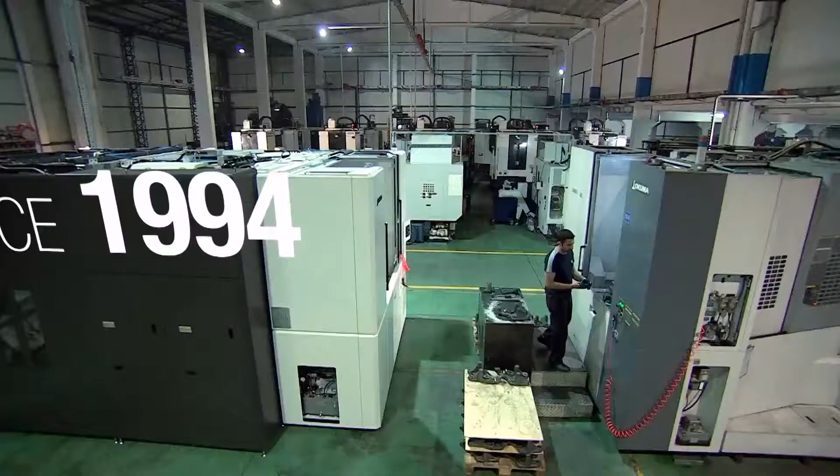Merging its 65-year sectoral experience under the roof of Sampa in 1994, the company specializing in heavy vehicle spare parts has established cooperation with international brands and has confidently adopted as its mission the manufacturing and service quality forever.

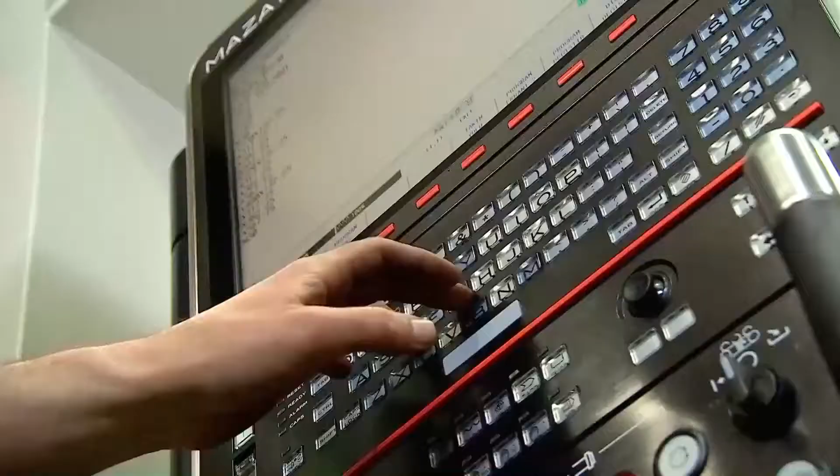700,000 square feet of production area. 1,080 employees, 144 of whom are engineers and technicians. Production for 18 different brands of European and American origin. Modern production units equipped with cutting-edge technology, consisting of more than 3,300 machinery.

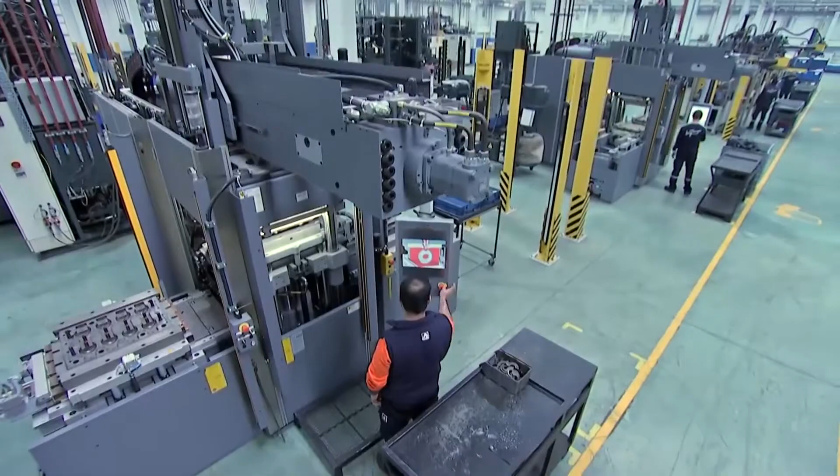Offices in the USA, Germany, Dubai, Russia, China, and Kazakhstan. We promise to serve you many products with the best prices, highest quality, and the speediest due dates, under the supervision of an R&D Center which competes with the future, and with fully equipped manufacturing units which combine different and complicated production models under the same roof.

Let's now see the world of Sampa, opening its window to the future.

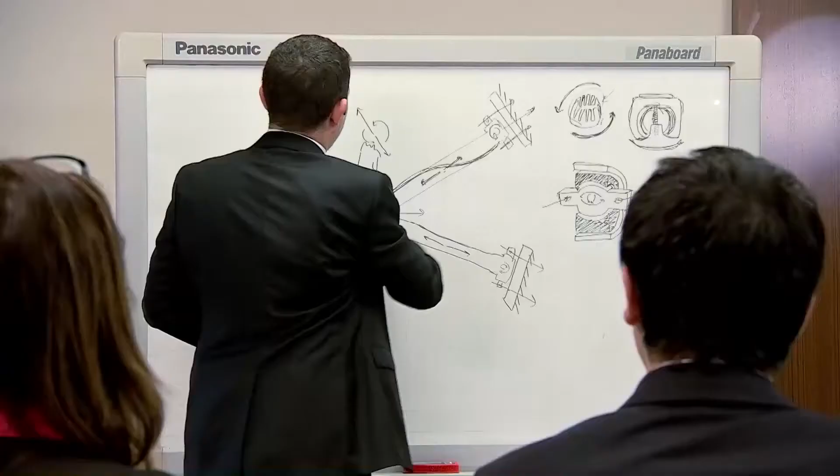Requests are transmitted to Sampa through OEM or aftermarket. It can be transmitted through OEM as projects which have ready technical documentation, or with the current structure to be developed, improved, or as joint venture projects which will be designed from scratch. Demands from aftermarket are actually carried out in the world of Sampa on the basis of advanced product realization by reverse engineering.

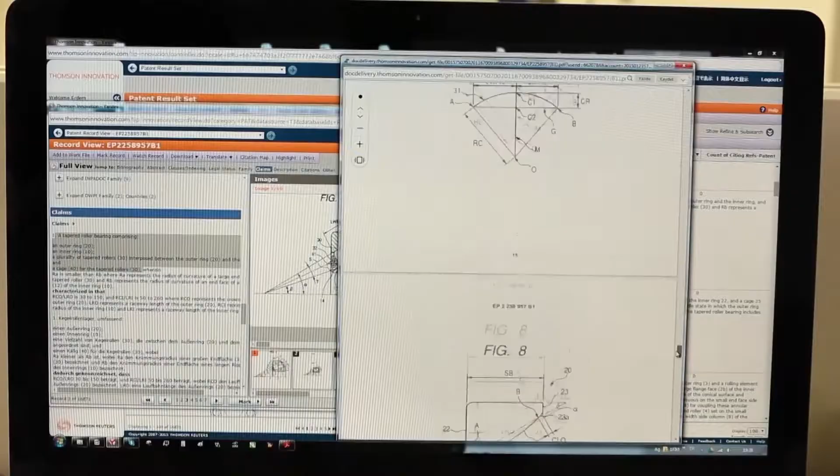The teams of specialists make extra patent investigations with the program named Thomson Innovation. R&D Department for revision and development.

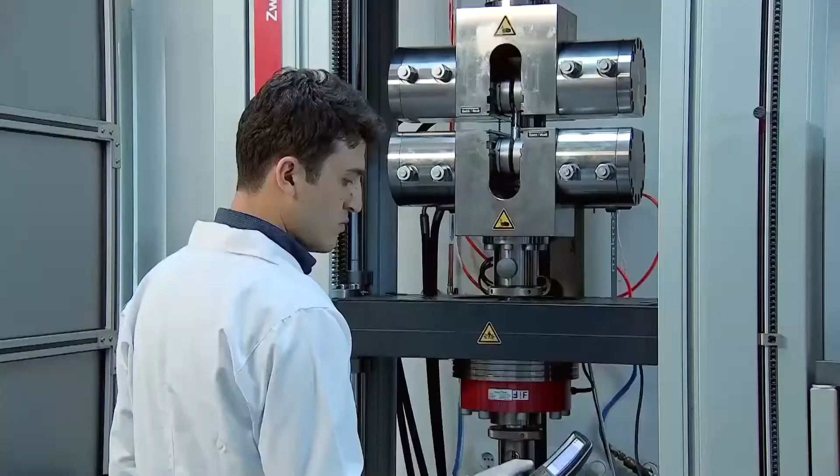One of the most developed R&D centers of the country. A 25,000 square foot office and laboratories where 77 scientists work, apart from the quality control laboratories established in manufacturing plants. 2.5% of the turnover is specially reserved for the R&D Center, which is accomplished with an investment of $9 million.

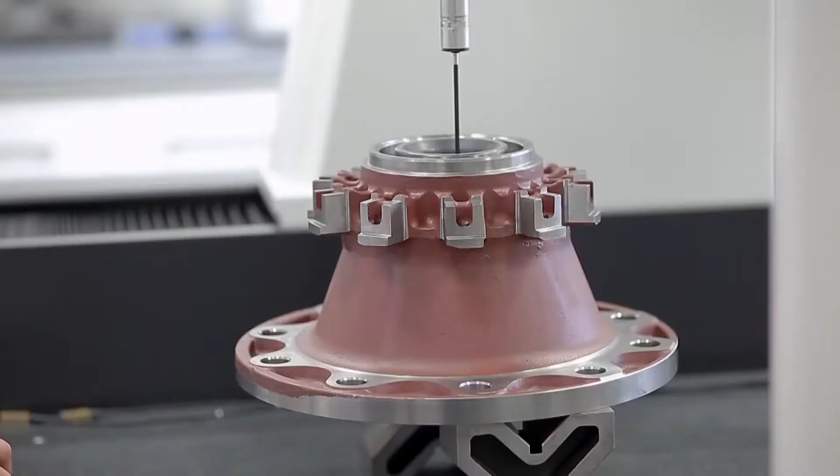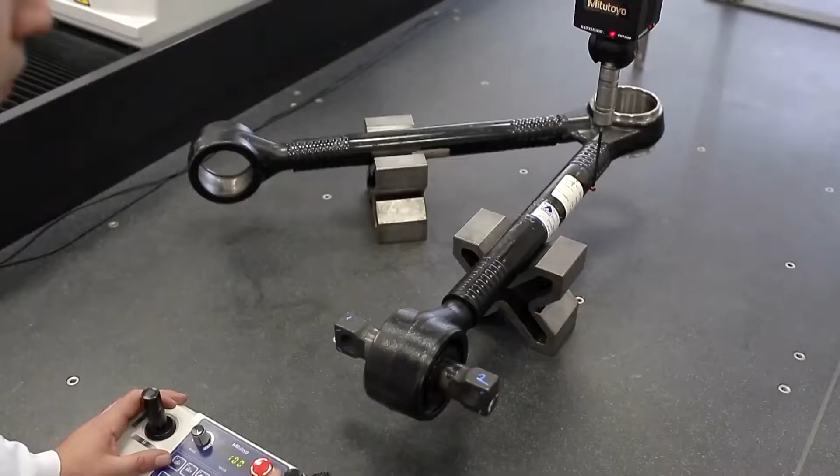Technical values of the received parts are determined with the most precise devices in measurement laboratories. Material characterization of the products is performed mechanically.

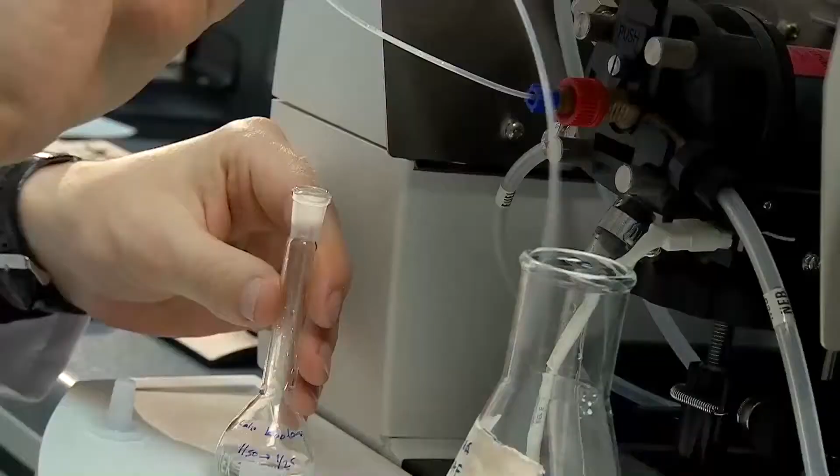If current material data is available on the CES Selector program, such materials are preferred. If new materials are required as a result of analysis, then new material designs are made in order to develop the performance of the products.

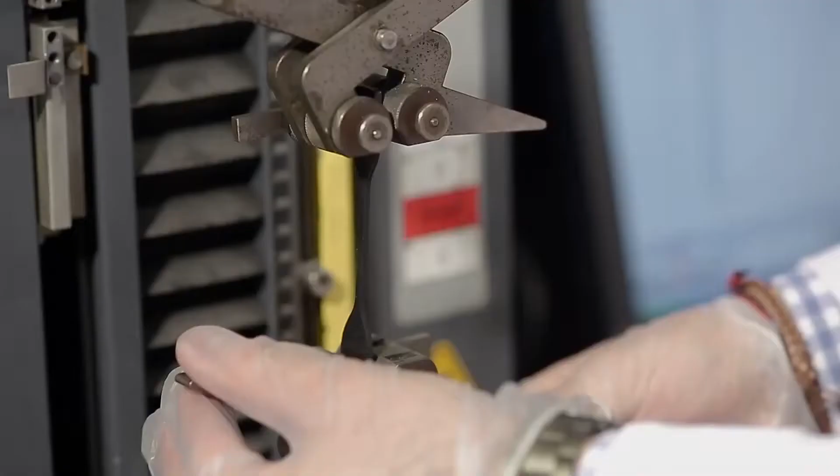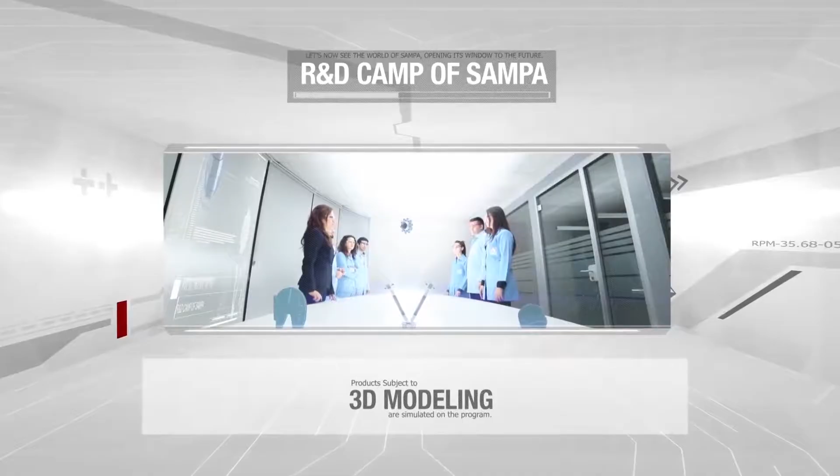R&D engineers analyze the results provided by the Measurement and Material Laboratory. Products subject to 3D modeling are simulated on the program. Thus, material and product design is verified. Any obtained data is submitted to the engineering unit, and technical specifications and a PPAP file are prepared.

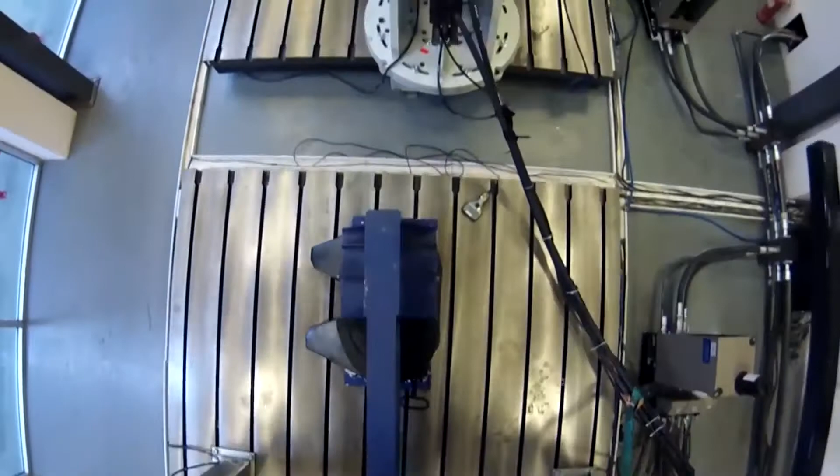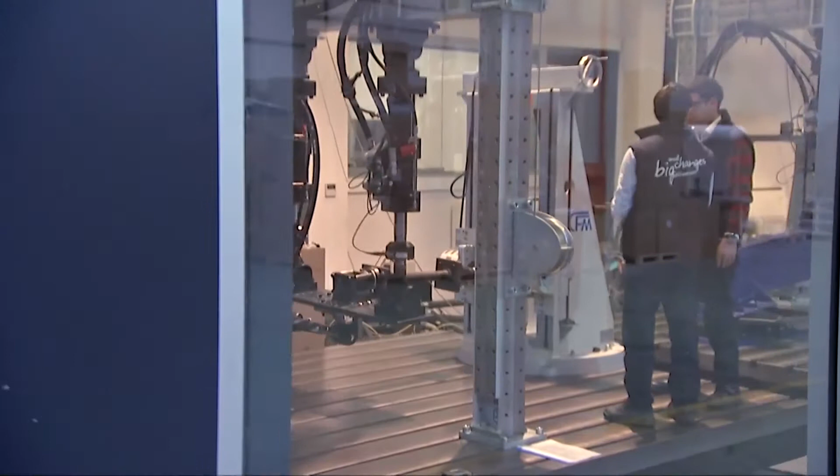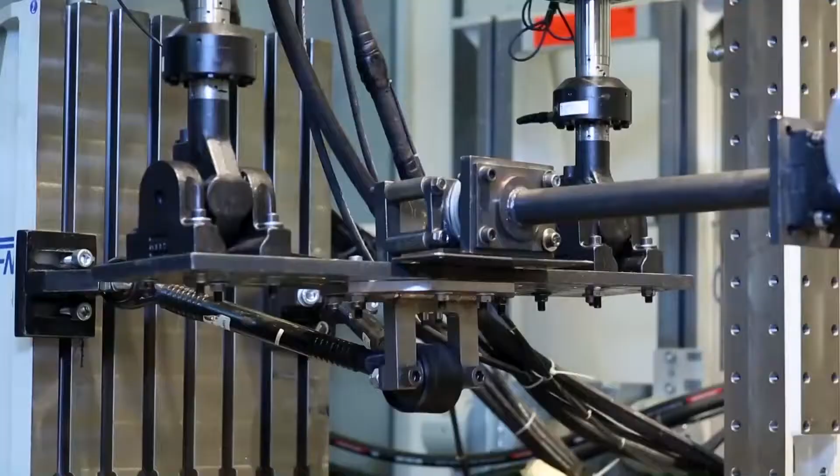Dynamic characterization of the product, which is subject to performance testing in MTS devices, is carried out by taking original operating conditions and simulation data into consideration. Dynamic characterization results here constitute data for benchmark.

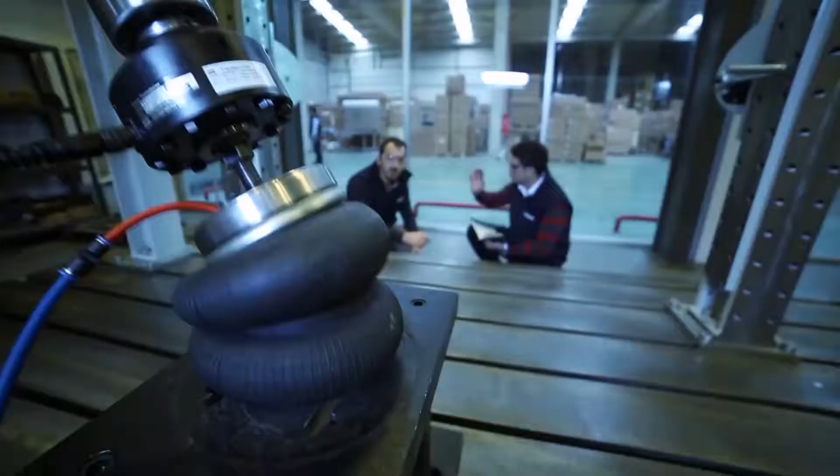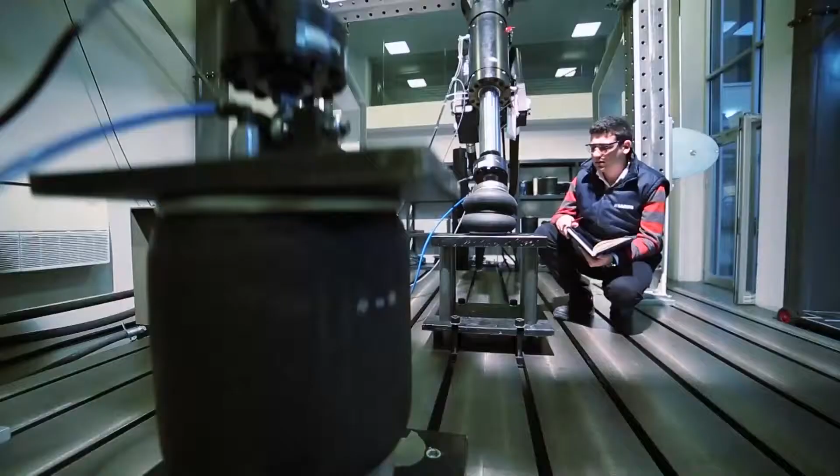Molding and process designs are realized for verified product designs. If the design is verified, startup is provided for the production. If there is a need for a prototype realization due to customers' expectations, prototype production for the product is realized with startup.

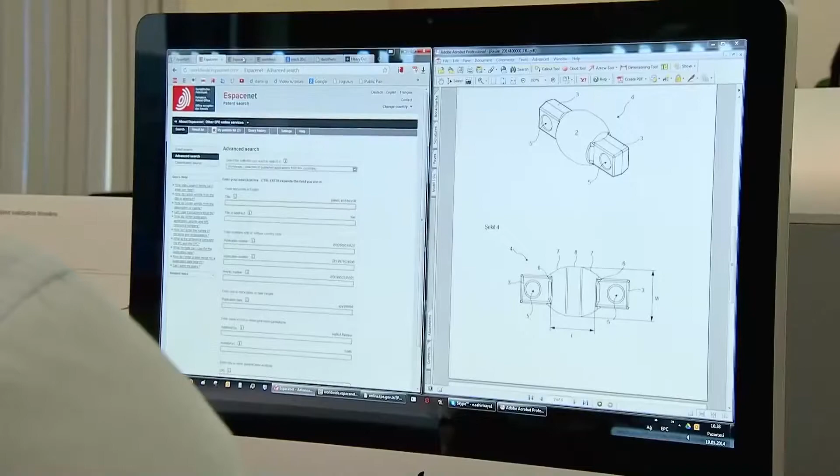Results obtained from dynamic test laboratories and design verification results are compared, and it is quantitatively revealed whether the design criteria and customer expectations are satisfied.

A benchmark report is created by comparing the test results of the original sample and test results of the prototype product. These results are the commencement of the following phase. Verified or developed design or product are on standby for production in mass production units.

Charming machinery, exciting digital panels, cutting-edge technology, and gigantic production complex. Raw material input required for mass production is commenced through raw material supply from global partners through supply chain management.

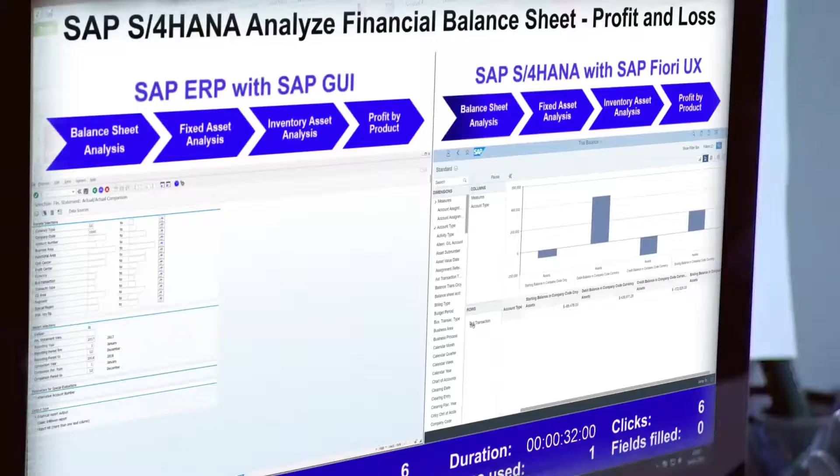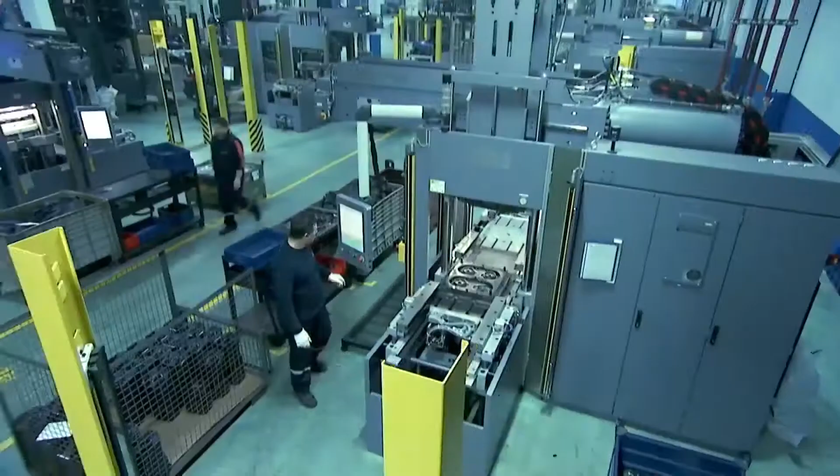Dream feeds the reality. The wheel starts turning when the dreams are transformed into a concrete goal, producing, supplying, and delivering, giving confidence at each step. Sampa has designed its production units with technology and quality focus too.

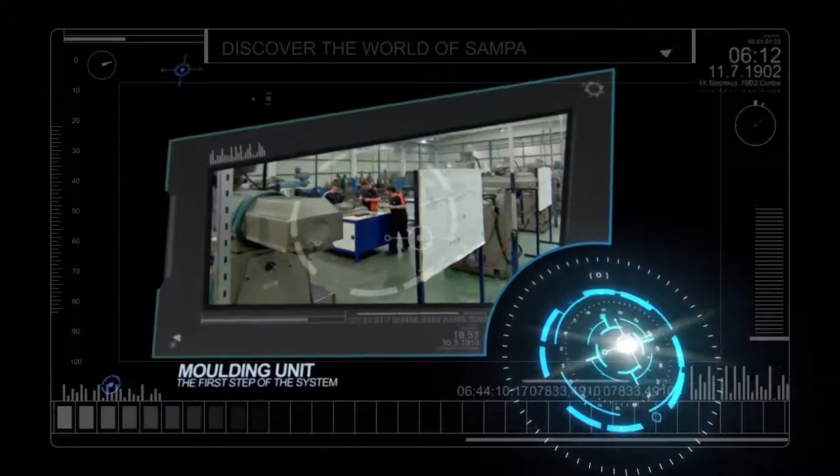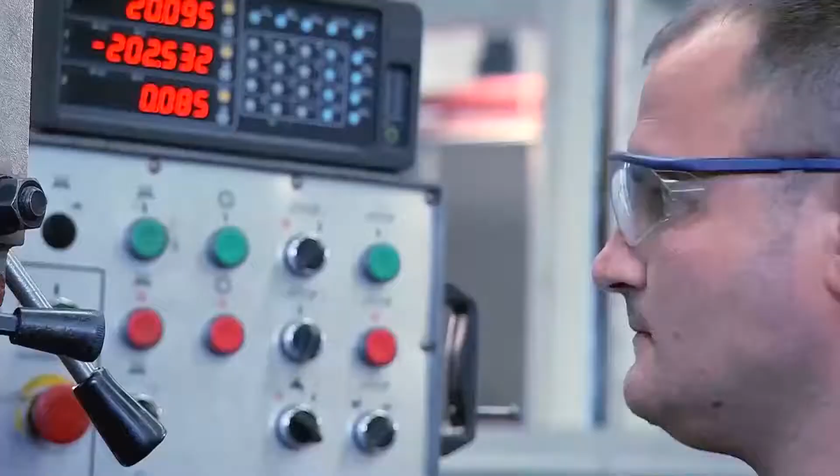The first step of the system is taken according to the directions provided by the R&D department and molding room. Relevant product mold, apparatus, or auxiliary equipment are tracked by mold product definition report and notification mails.

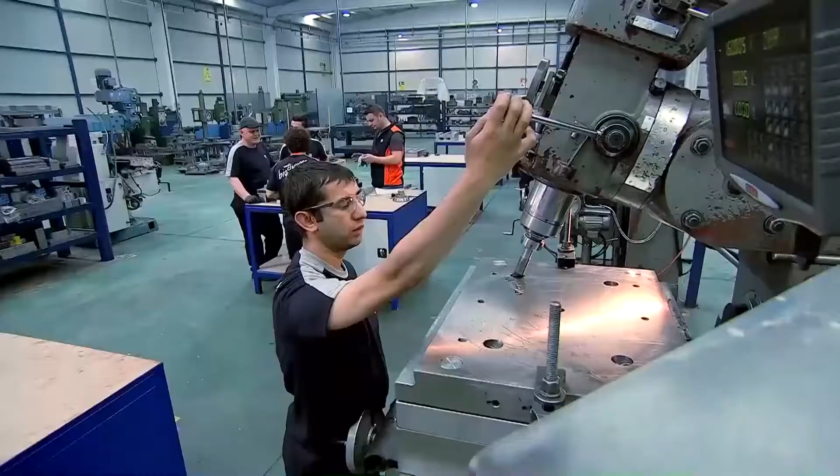Suitable steels are determined according to the type of mold to be produced, and molds in compliance with the specifications are produced. The result: if the products are suitable, the mold is delivered. If not, they are submitted to molding again for performing required corrections.

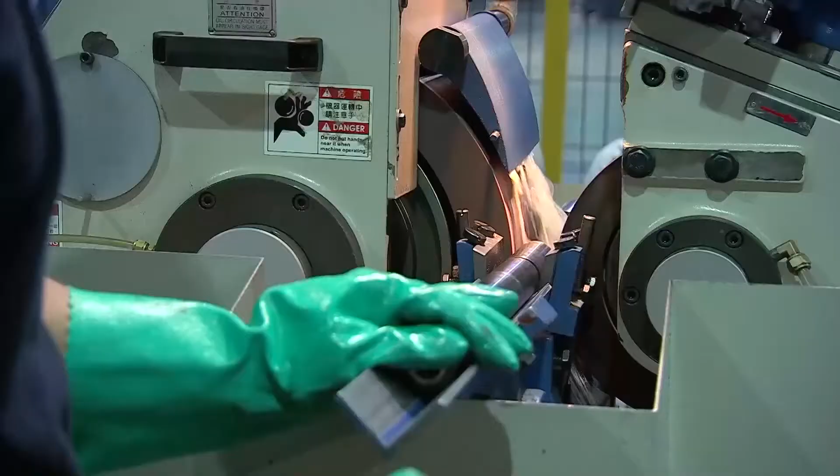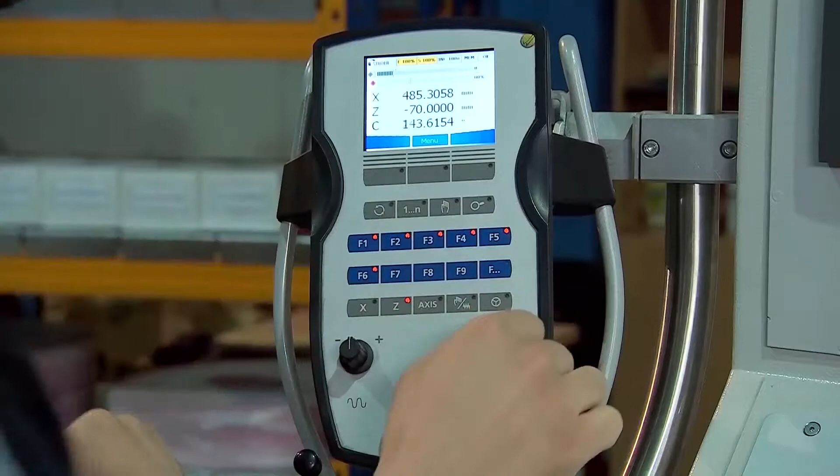Machinery, a magic created by human during his adventure in the world. These mechanical fellows of the manufacturers are integrated with digital technology, and each step toward production is realized with a ceremony at Sampa.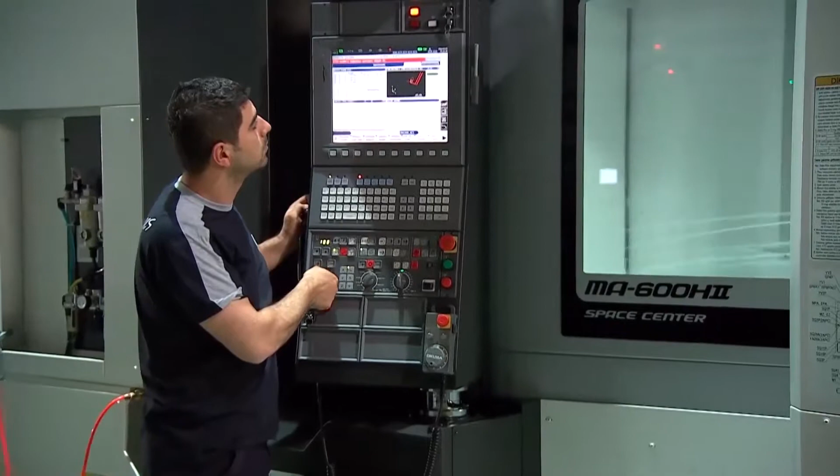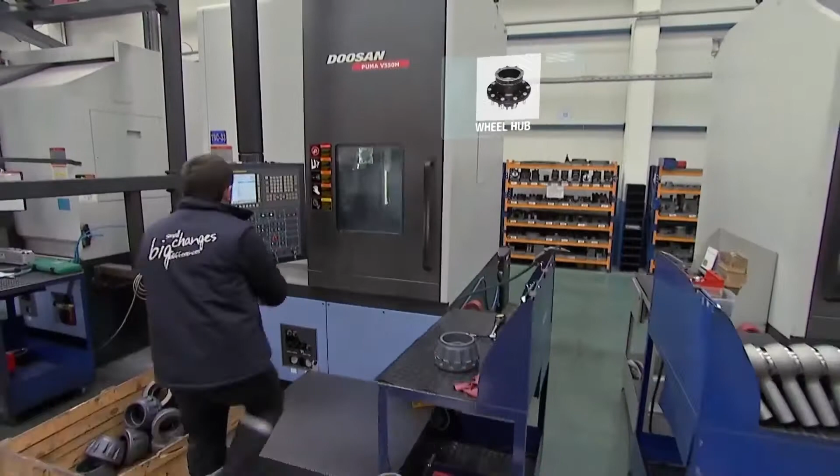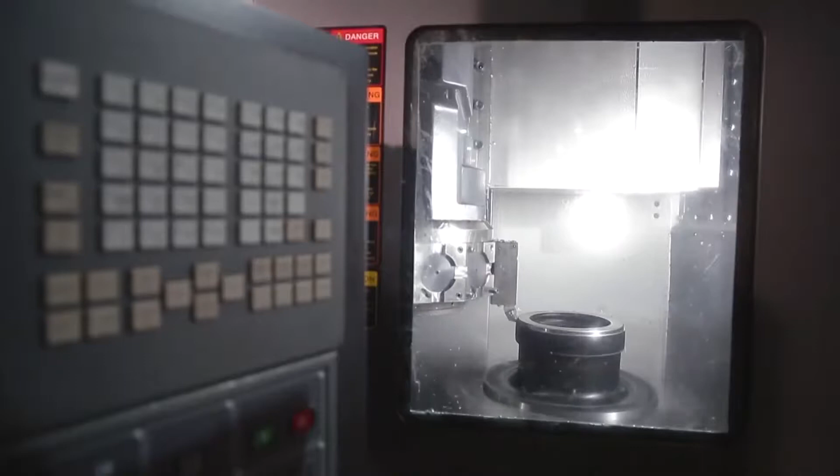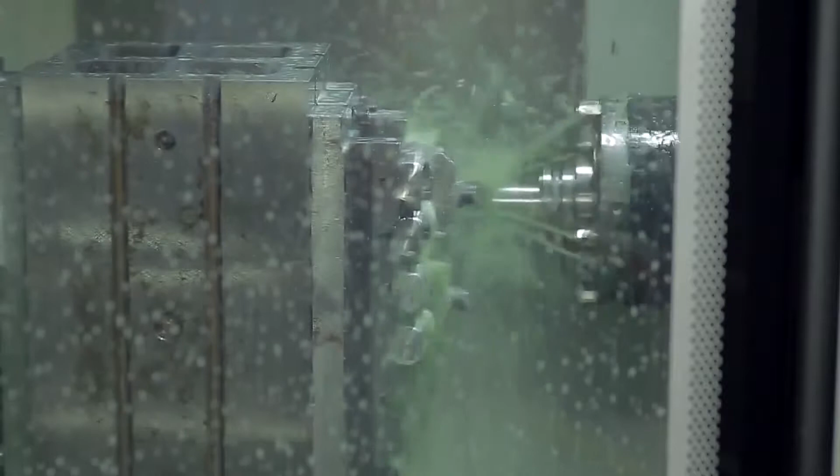Upon material input, quality control verification preliminary preparation is carried out according to CNC lathe in the plan. Initial product is machined upon starting up the prepared program, and dimensions are checked without removing the piece from the lathe. Upon performance of the measurements according to process picture by quality control unit, mass production is commenced upon obtaining verification.

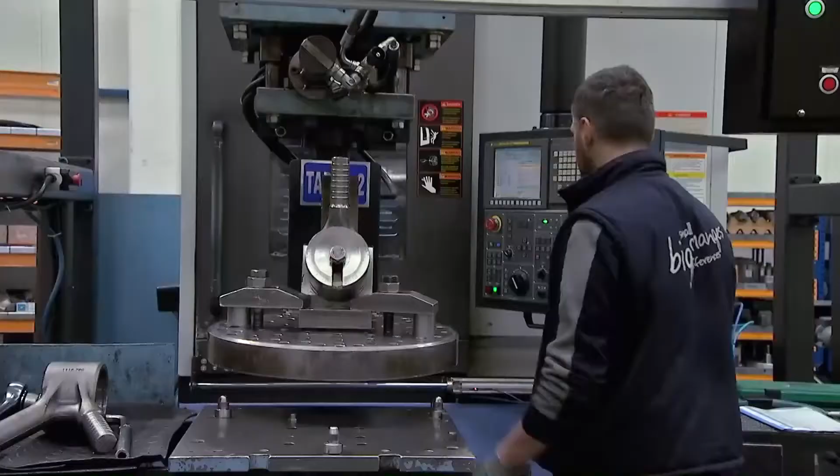The procedure, which is checked precisely at each stage at Sampa, is carried out as usual naturally by the teams who know what to do and where to do it.

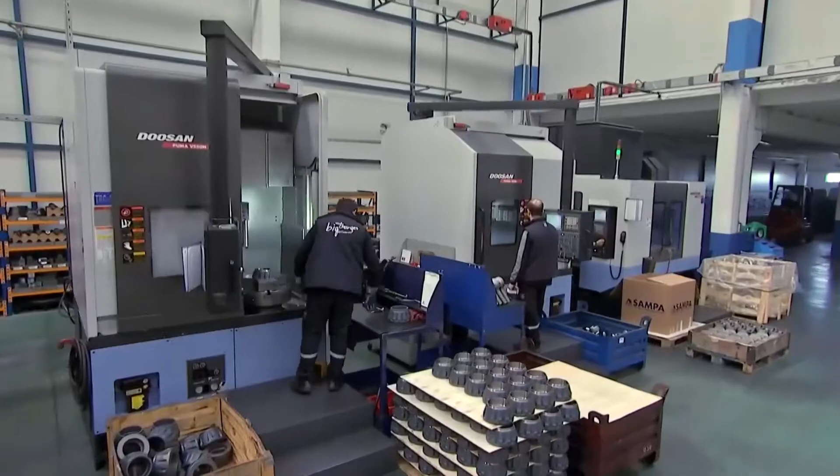Sampa uses SAP MII, Manufacturing Integration and Intelligence module of SAP, which contains production tracking, machinery layout, and maintenance forms in order to ensure continuity of this healthy operation.

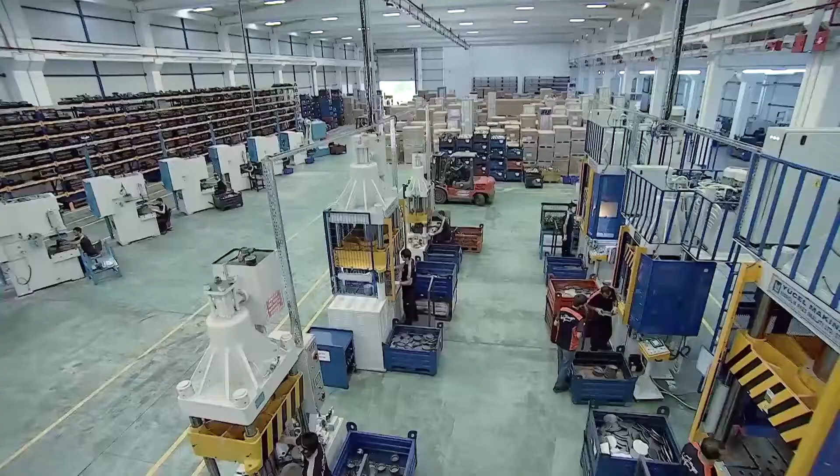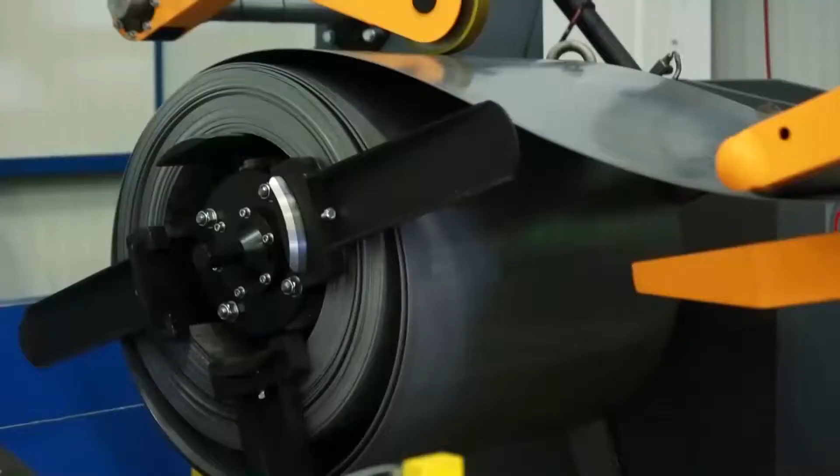Suitable plate or rolled metal sheet is manufactured for production items, which are included in the planning. Cutting plan is prepared according to quantity and mold. Input productions in the work order is provided to the operator, and processing is started to shape the metal sheet.

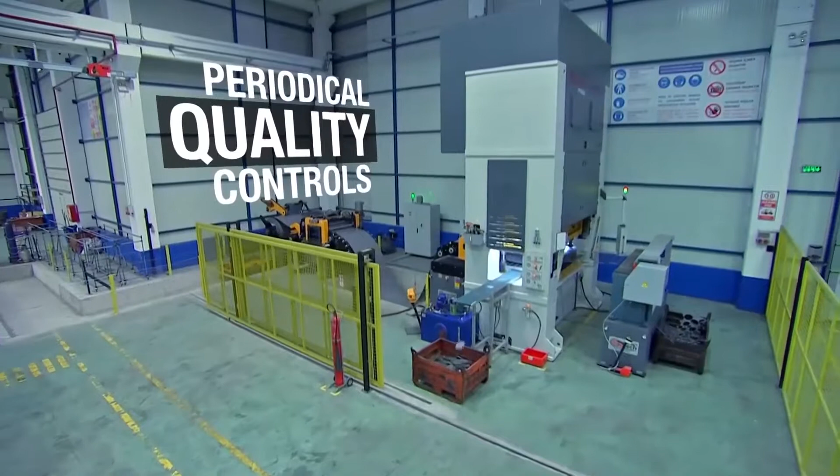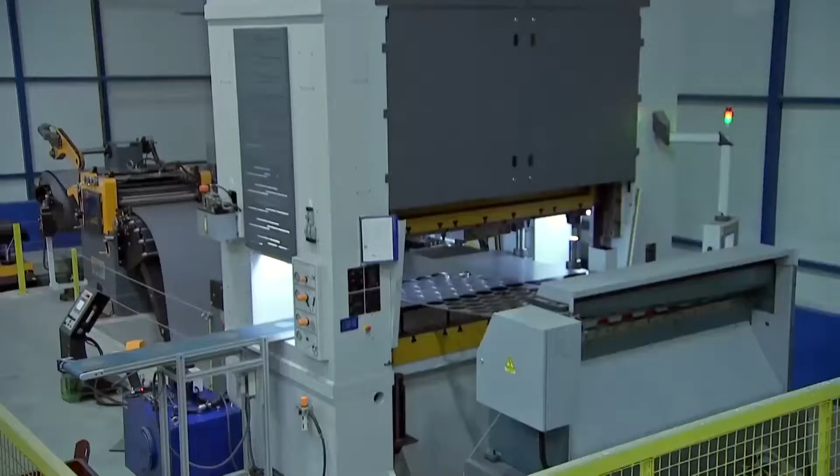Periodical quality controls are not skipped during production. Final result is obtained by connecting other molds to the respective presses according to the route of the product. Here, the operator completes production tracking forms after each process. Completed products are delivered to the warehouse upon being subjected to final check.

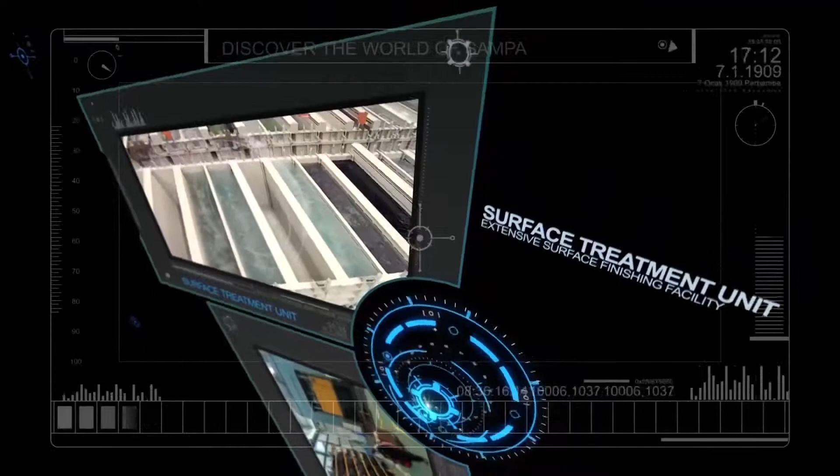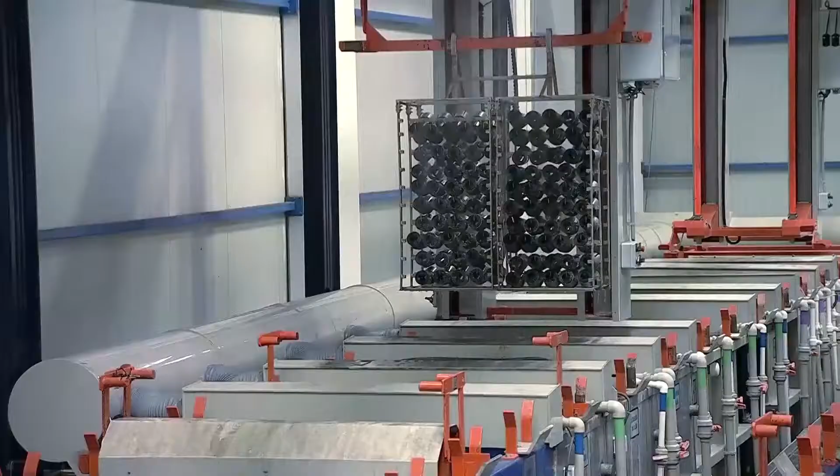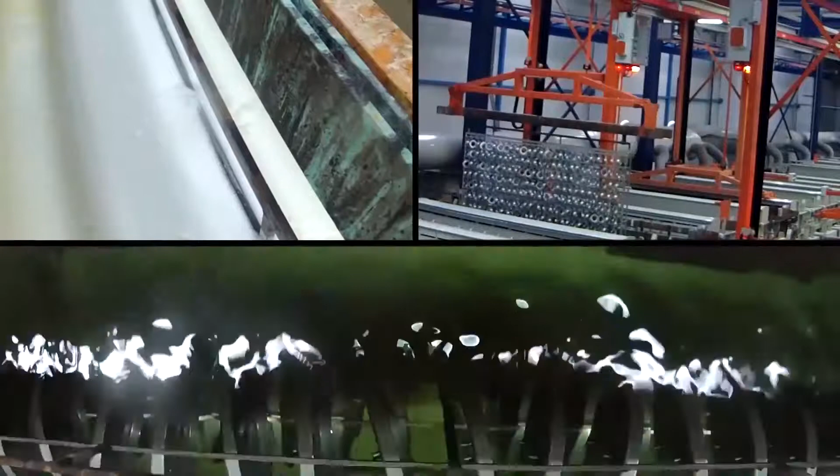Extensive surface finishing facility, which comprises of zinc phosphate, iron phosphate, alkali zinc, zinc nickel, sandblasting, chemical paint, and degreasing machinery, is arranged by placing emphasis on environmental, work, and worker health, like in other machinery groups of Sampa.

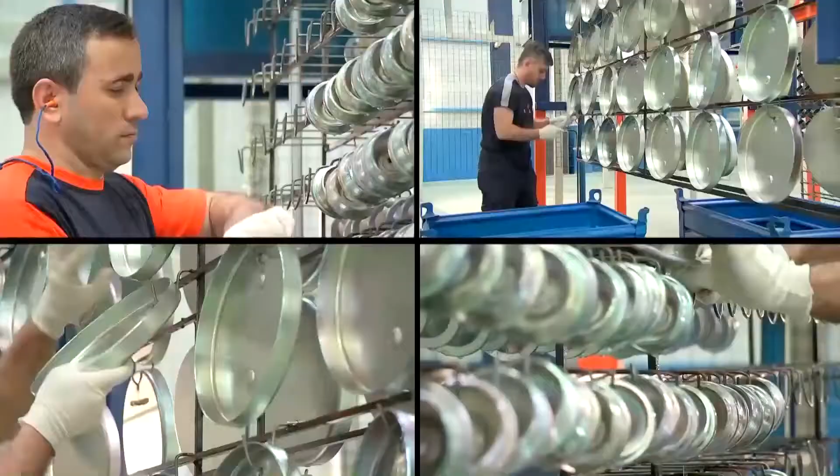Using the leading coating chemicals of the world, Sampa works with maximum corrosion resistance goal for its automotive products. It can perform salt test, coating thickness measurement, and material analysis in the laboratory it has established in order to check the standard and to keep it at the utmost level.

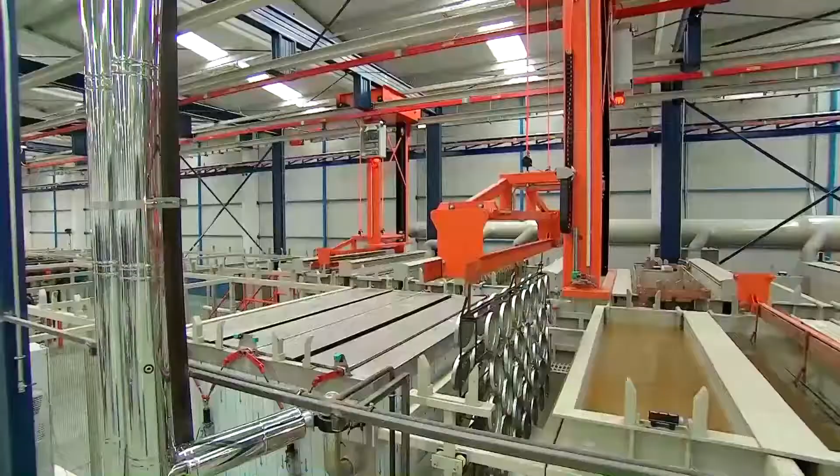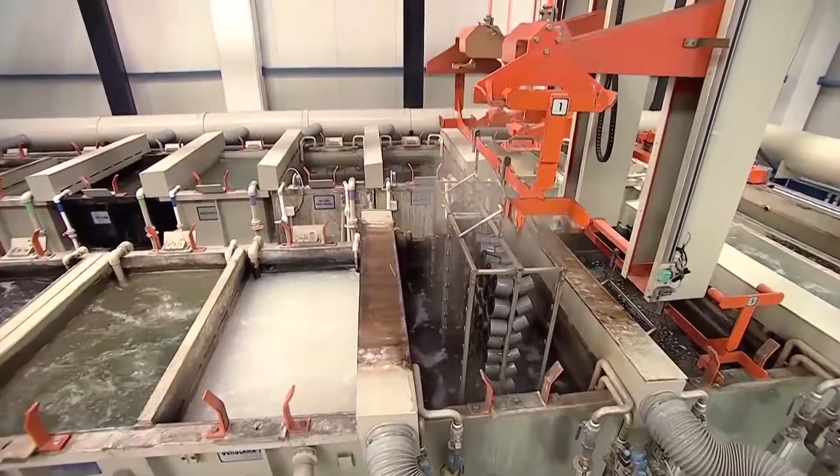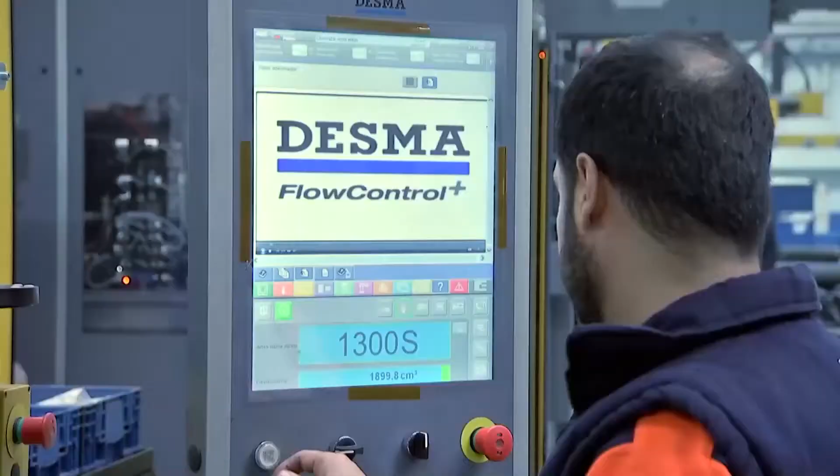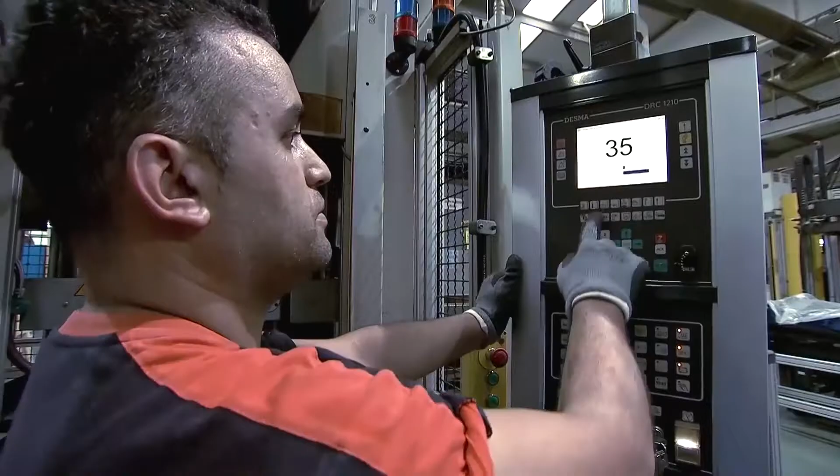On rubber injection molding machinery, product molding conditions are recorded on the memory, and a ready-to-use program is created for future operations on injection machinery, which are connected with molds at temperatures of 320 to 338 degrees Fahrenheit.

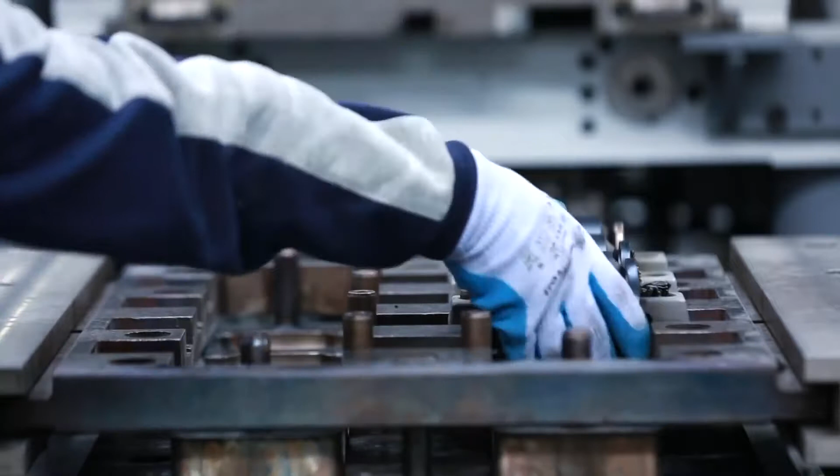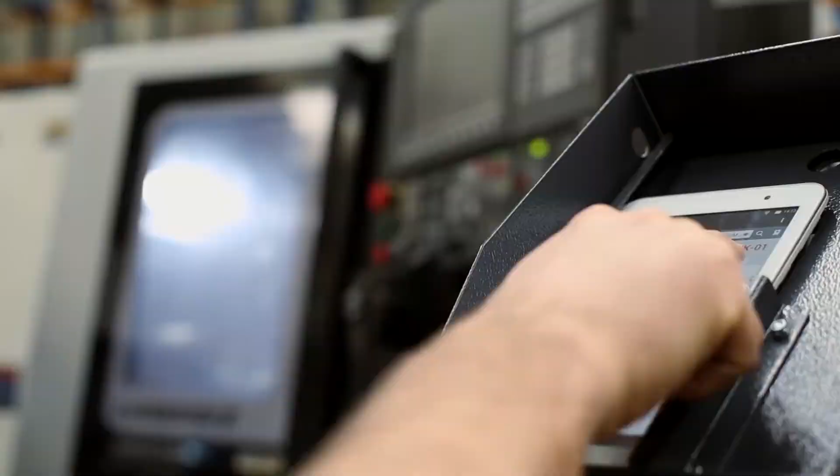Machinery settings are performed according to type of compound, product weight, and mold runner system for new products. Semi-finished products, which are subjected to surface finishing, are molded following machinery settings and subjected to verification of quality control. Upon verification, the product which is molded in quantities according to the work order is delivered to other production lines for the specified operations.

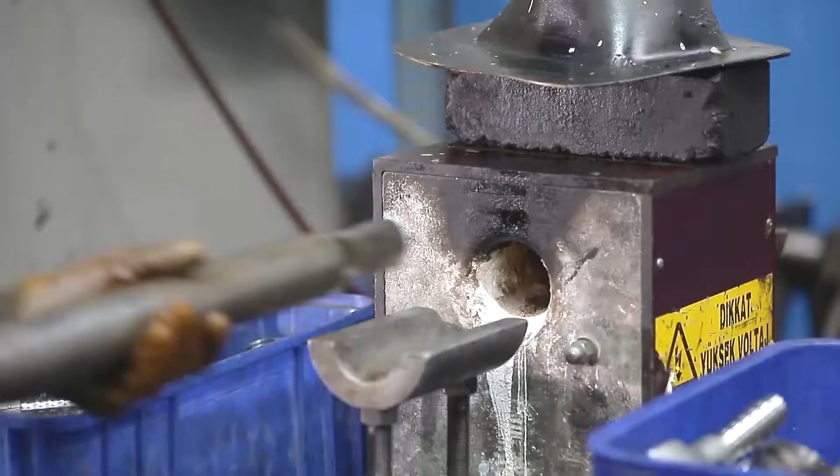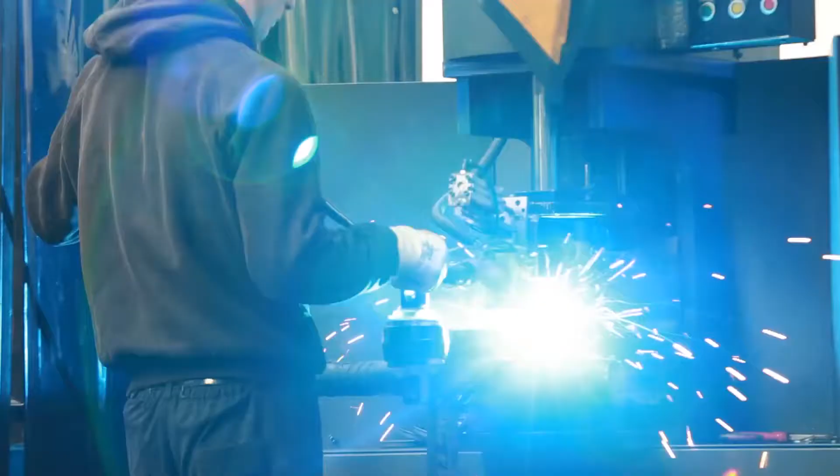Pieces delivered from different production units are shaped at Sampa's V-arm department. Diameter and rear section processing is realized during rear section processing and main processing phases of the V-arm. For centering, products are connected to the drilling bench using suitable tools.

Tie rod body is subjected to centering following diameter and rear section processing. Interior diameter hardening process is carried out on the induction bench following tip processing.

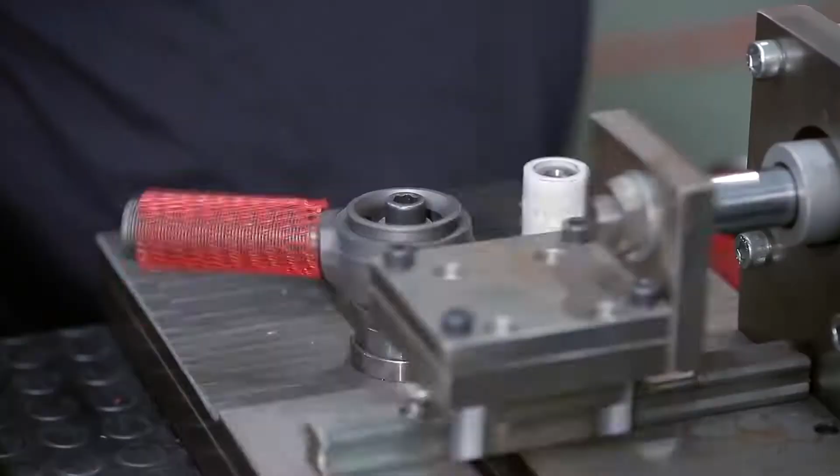The procedure, which is checked precisely at each stage at Sampa, is carried out as usual naturally by the teams who know what to do and where to do it.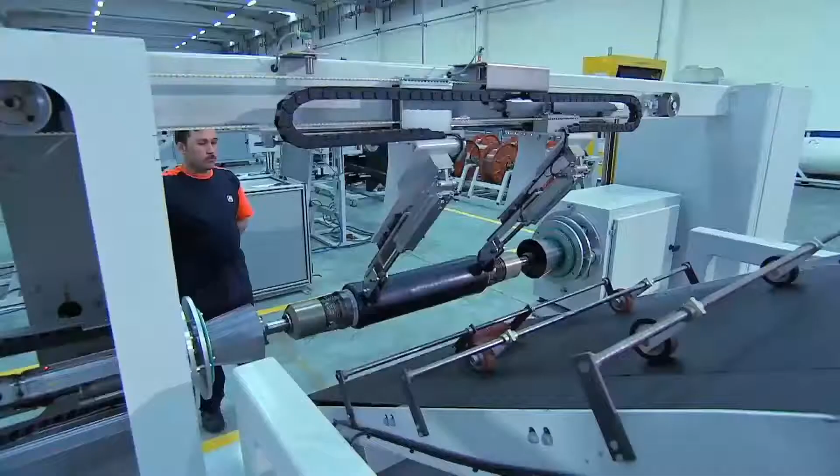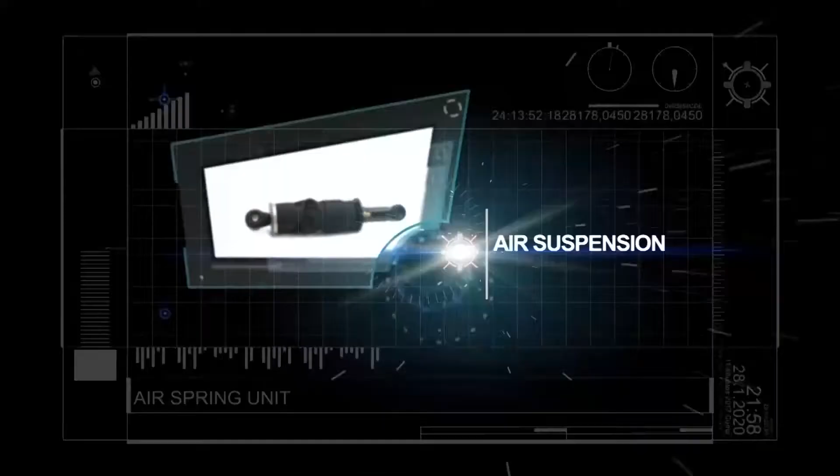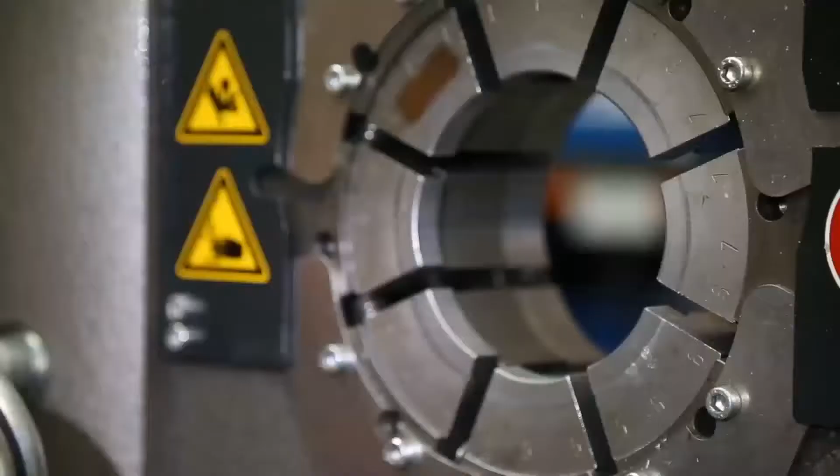Primarily cord fabric and rubber compounds are cut according to the dimensions on the operation cards for the production of cabin bellows with or without suspension. Prepared hoses are cut to the length dimensions of the bellows to be produced and then introduced to the assembly line together with required bushings, rings, metal sheet, and plastic semi-finished products.

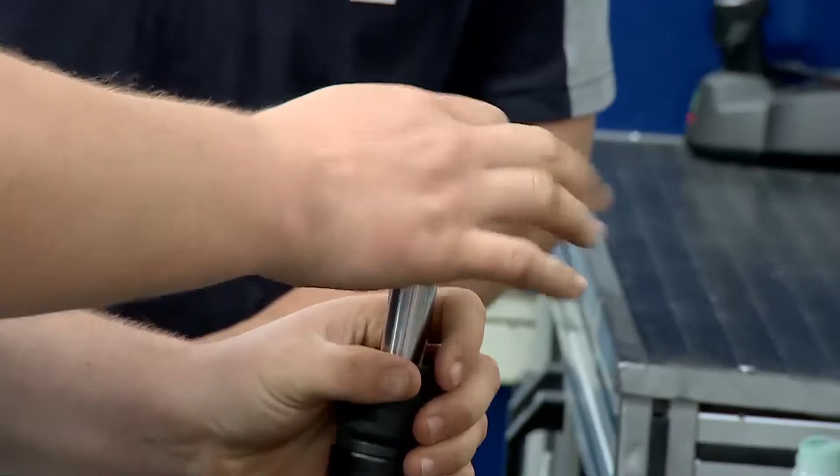Subjected to leak tightness test at 3.5 bar and folding test at 7 bar following assembly, the products are subjected to inflation diameter control at the test device. Manufacturing suspension bellows with or without piston, in addition to airbags, the unit never ignores the priority of quality at any detail, including textile support to the wire.

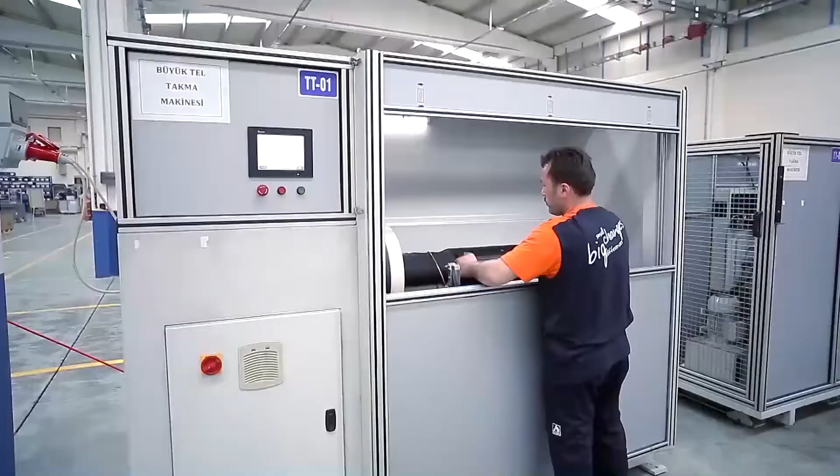Emphasis on quality at each stage, from supply to design, from production to shipping. In other words, insistent quality control checks are all about Sampa.

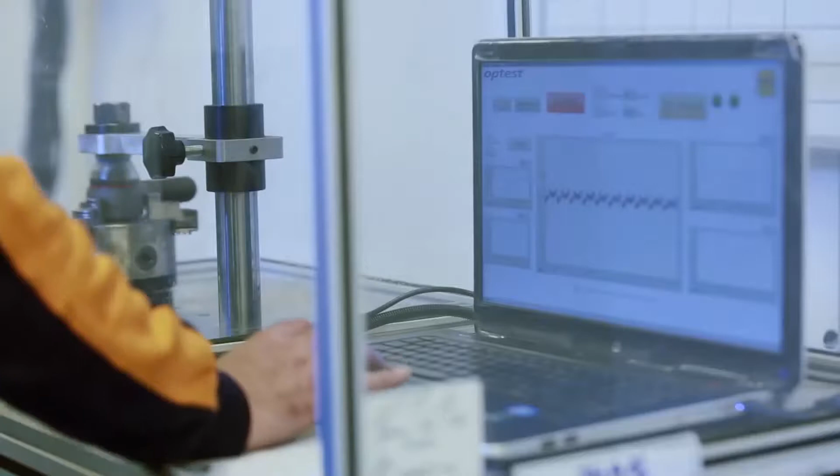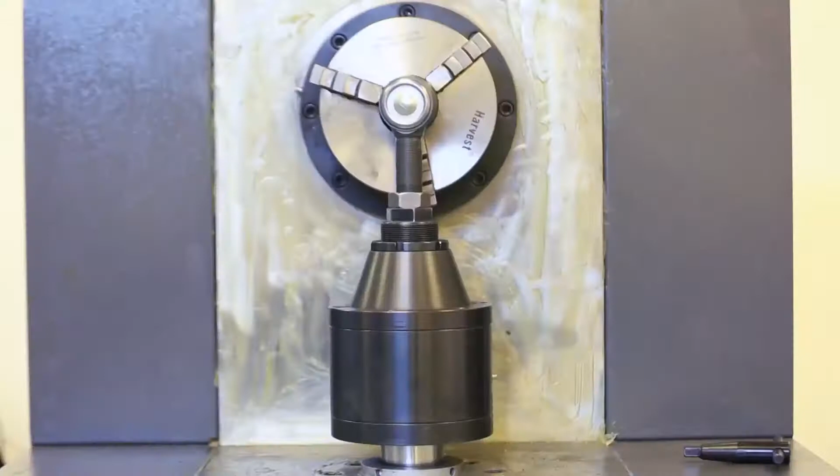Quality control processes, specially designed for each manufacturing process, are applied in all units at Sampa. These processes are repeated periodically at the beginning of production, during, and at the end of the process, pursuant to national and international standards and the ethical values for automotive product manufacturing. Quality laboratories at Sampa are located in the production facilities, separate from the R&D camp.

We adopted the quote of Marcel Proust as our motto. We are striving to be able to see each product from a new perspective and create difference with our work, and to add value to life. Come and discover the world of Sampa.